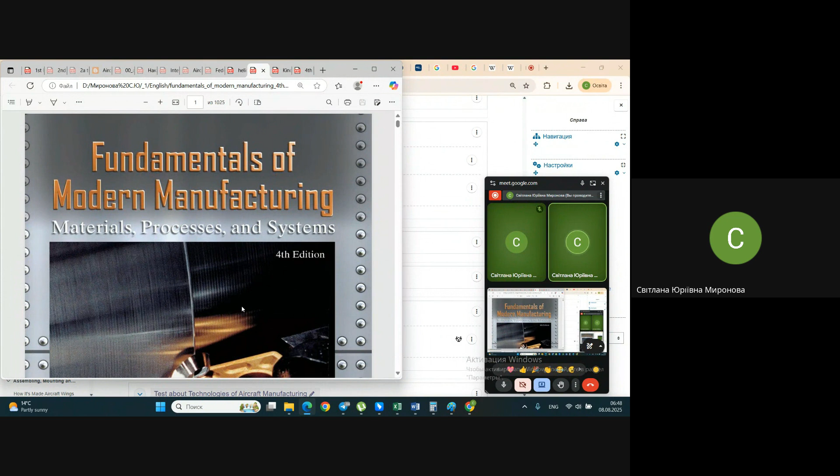Before we go into studying manufacturing processes, peculiarities, and so on, first we need to talk about definitions and concepts. Do forgive me, I will use my channel immediately without making additional slides. Slides we will have, but not about this topic we're going to study right now.

First, we need to talk about what we understand as technology at all. Actually, even before this, we need to talk about production, or not even production cycle — it's called product life cycle. What do we understand as product life cycle? Better we'll talk about it at the end, when we have already surveyed everything and approximately understand everything. Approximately understand — no one understands it completely, you know. Then we will do a survey of production, of product life cycle, when it comes to aircraft.

So, technology — what is understood as technology? In our language, we have two different words: технология and техника, technology and something like technique. But in English, they have only one word for two different concepts. Technology, on one hand, is understood as families of vehicles, let's say — for instance, aerospace technology. The native speaker of English understands it like aircraft, airplanes, space rockets, and so on — aerospace technology, vehicles.

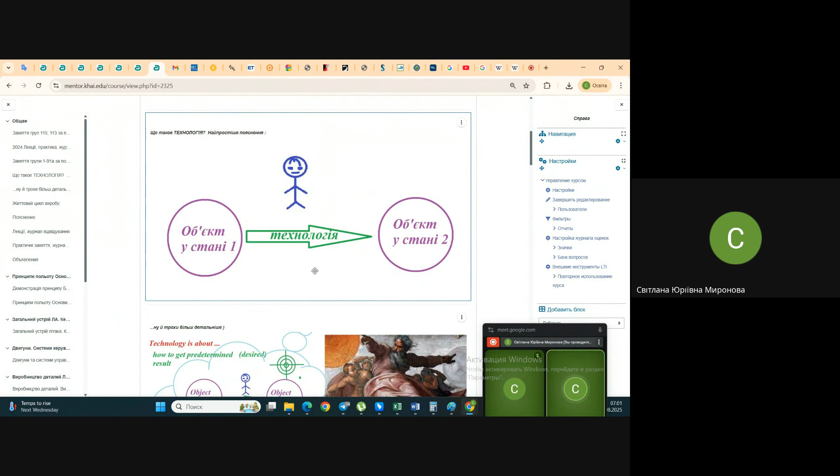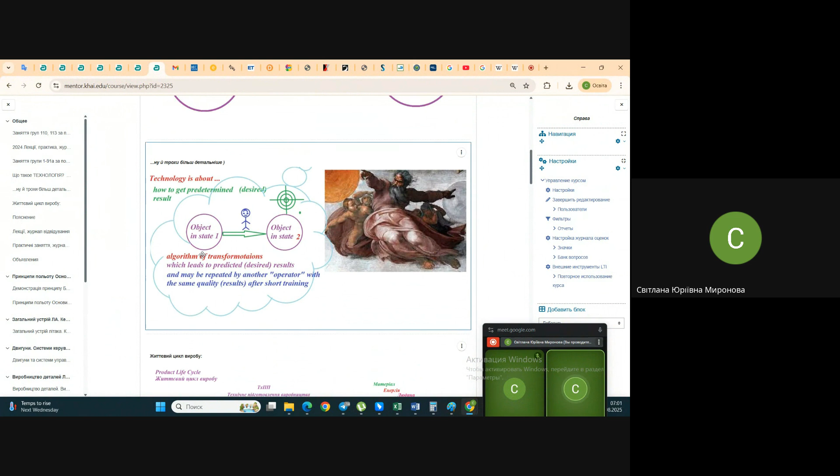Here is a picture in English now. Technology is about how to get predetermined, desired results. Here is such a scheme in English. Where did it disappear from the English slide? No idea, I need to place it back. Technology, once again, includes three hidden moments in this definition.

First, it's the algorithm of transformation which leads to desired intended results. We understand it already. And what is the difference between technology and art? A piece of art can't be repeated exactly by someone in the same way.

A piece of art is a unique thing that is not to be repeated. It may be copied somehow, especially by modern means. It may be replicated, repeated sometimes, but it's not about being reproduced exactly. It will be visible anyway that it's a copy of a piece of art, and even copying this piece of art usually takes a long time, whether it's sculpture, garden design, buildings, or whatever -- if it's a piece of art, it's not to be repeated.

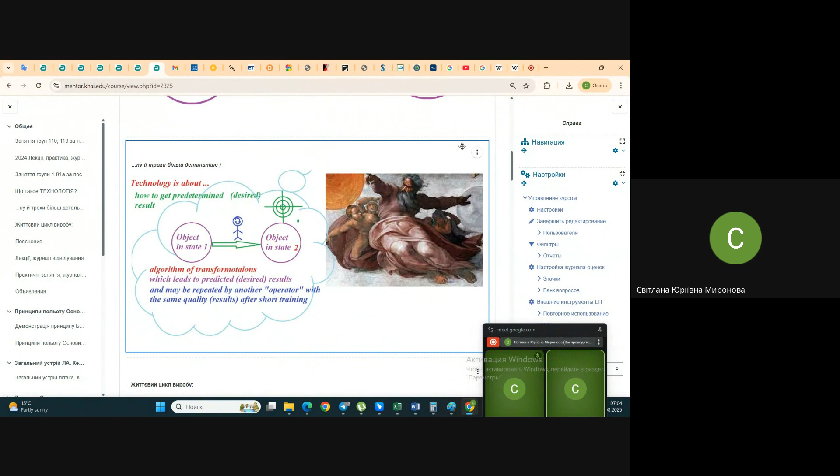Once again, what are these three secret moments? Algorithm of transformation -- we have some aim, we mean to reach some exact results. Hidden within transformation, the object is changed during this technology's application. And technology has the property of repeatability by another person.

That is technology. Now let's come back to what we started with. Okay, let's leave it here. On the left you see my picture, let's say, and on the right you see a piece of art by Michelangelo Buonarroti in Italy, a masterpiece. Well, we needed this, and we need also this. So you understood, I hope.

And now, an important moment in the scheme that was visible -- object. What is the object of technology? What might be those objects of technology? Do pay attention. Next post. Here is.

Once again, it may be some piece of nature, raw materials, so-called raw materials -- earth, water, oil, gases, wood, whatever. It may be some semi-finished product that has already been processed preliminarily by someone else.

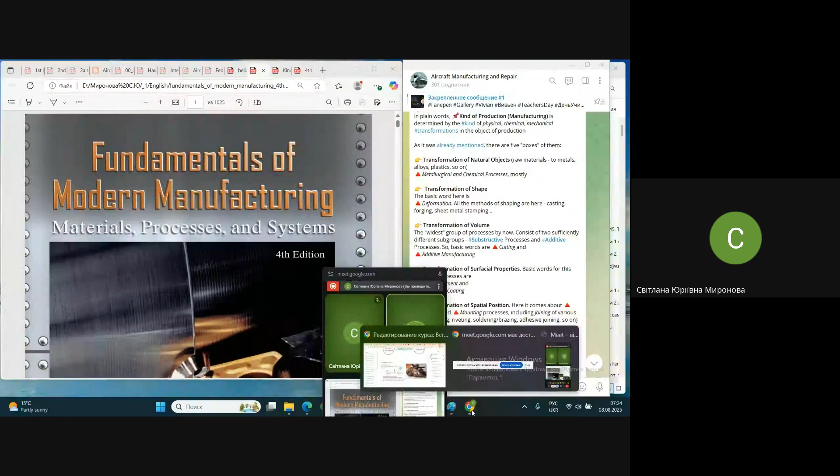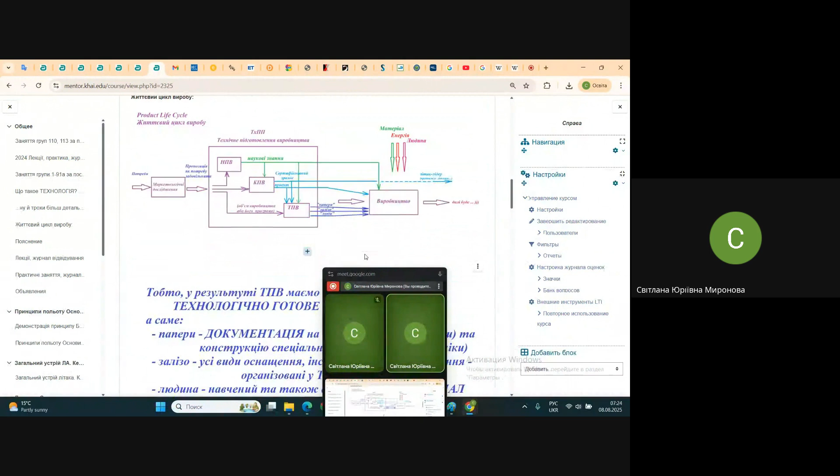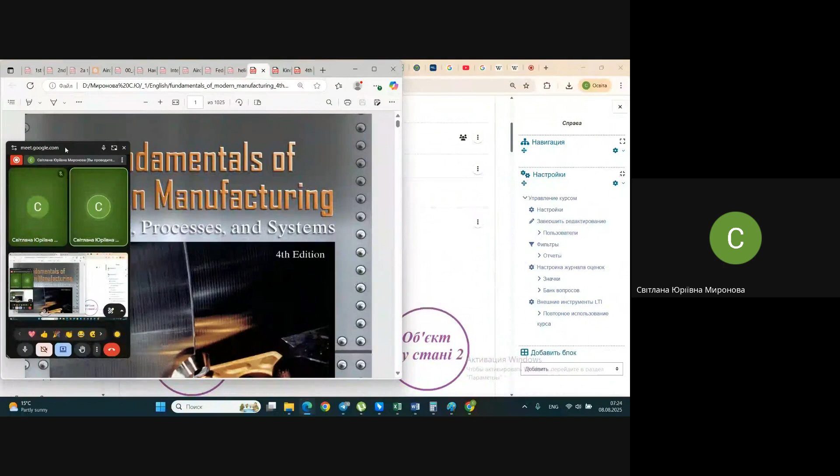Originally, each transformation in schemes was reproduced like a black box, let's say. We do not... where am I? Here it is. How do I move it to another place? No, not here. Somewhere in my folders. We will draw a similar scheme anyway. Why wasn't this scheme prepared for you preliminarily in these slides? I need to place it so it doesn't interfere with the screen, but on the other hand gives me the opportunity to operate the screen. I'm afraid to remove it because in that case I might lose attention and not notice if something went wrong.

As it was already sometimes when I've been recording your classes, well, you see.

Transformation of natural objects usually isn't about manufacturing of aircraft. Usually it comes about products of metallurgical, chemical industry. It's not mostly what we're talking about when discussing manufacturing technologies.

Once again, we represent this scheme as so-called black boxes. Black boxes means we don't try to understand what is inside, we watch only what is on entrance and what is on exit.

Originally, on entrance we have natural objects, whatever kind they are, so-called raw materials. It's metal ores, it's wood, it's water, raw oil, gas, whatever - some minerals, some organic, non-organic materials.

And finally, what it may result in is either appearing of some pure metals, or metal alloys, or materials like ceramics. Ceramics may be traditional ceramics we get used to, so-called soil, or it's maybe already metal ceramics, even powder metallurgy, so call it.

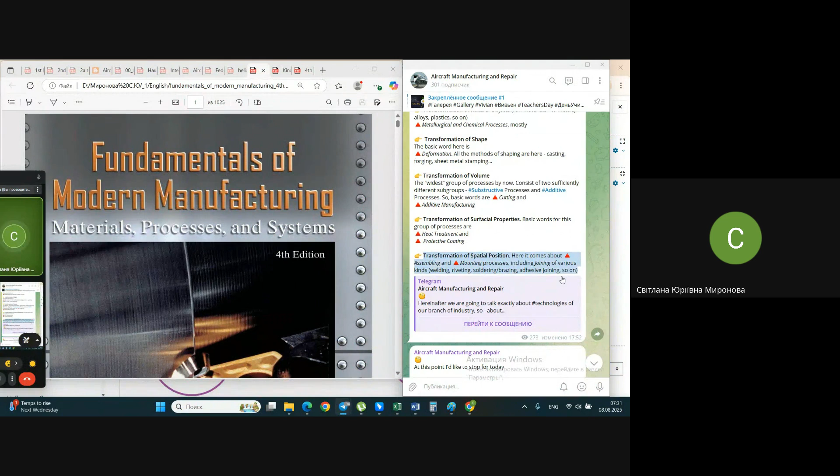Here it comes mostly about assembling and joining. Together with assembling, like hand in hand, goes so-called mounting processes. Actually, joining is a portion of assembling and mounting processes. If necessary to understand transformation of spatial position, once again: assembling, joining, mounting.

And inside each of those groups, there will be a lot of not even processes, but first it comes about different subgroups. And next it comes about the processes inside of these subgroups and sub-subgroups.

Of course, we may start drawing this scheme immediately, but really it may be more simple for you first to see some illustrations, maybe even a short video, and next all the information we have gotten we will try to align into a scheme. To be frank, why I said we have no such scheme, like why I have no one sheet, one piece of paper or one screen with this scheme - each time we draw it together with students, together really in classes, it's a little bit technical, not simple for me, but better for you, for your understanding.

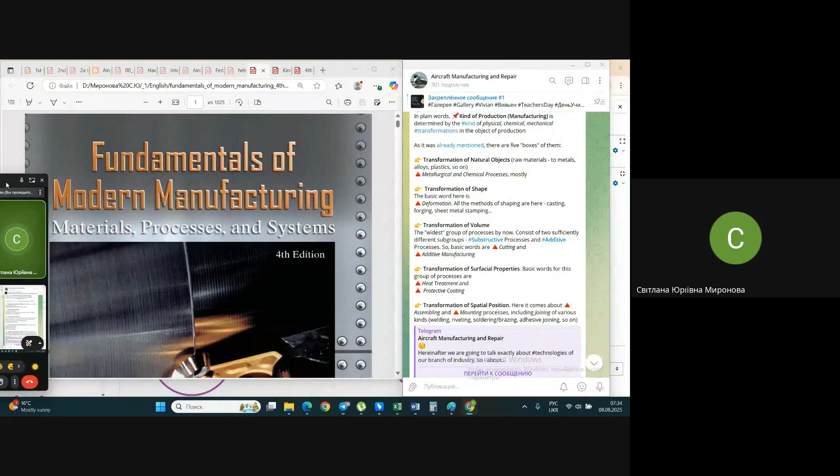As I said, it comes about hundreds of different technologies, and any attempt to align everything on one piece of paper would make that paper enormous. Computers help in this sense, we may use an endless sheet in Paint or elsewhere to try to create such a scheme. Usually we see these schemes by pieces, given in different books and standards, because if you try to categorize all those processes by groups, subgroups, classes, and subclasses, it becomes too much, a very difficult scheme to understand and watch. So usually it's not given as a single scheme for everything.

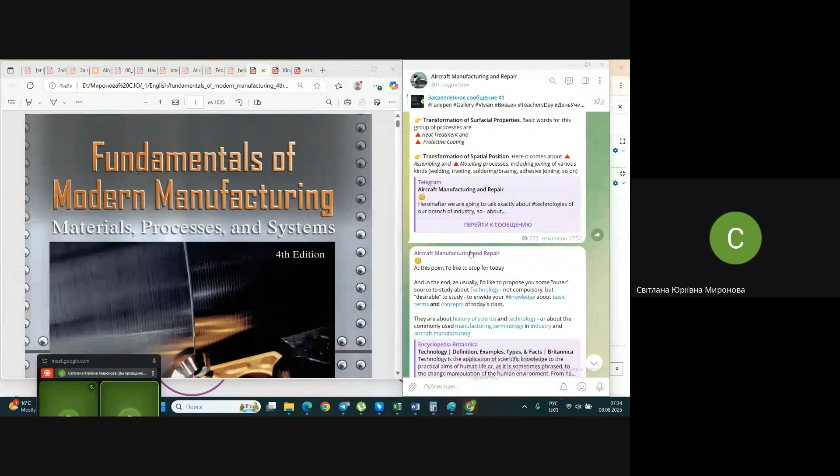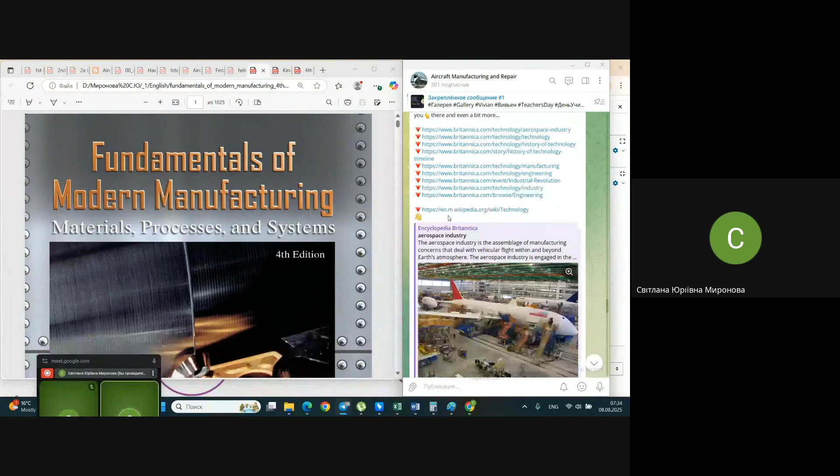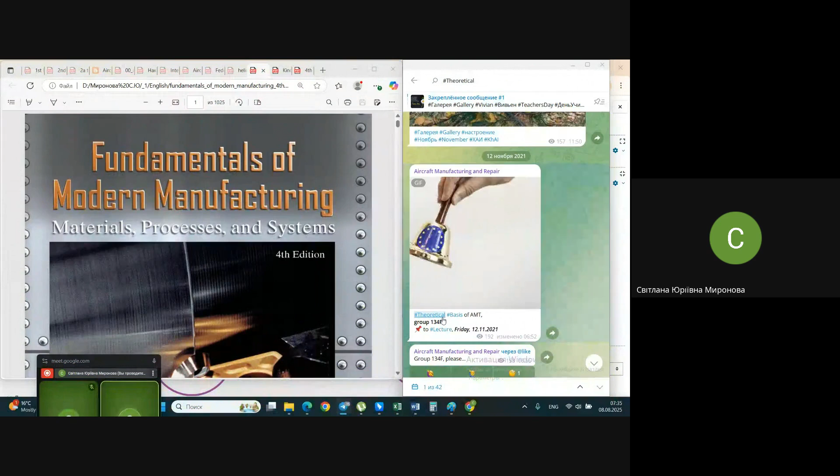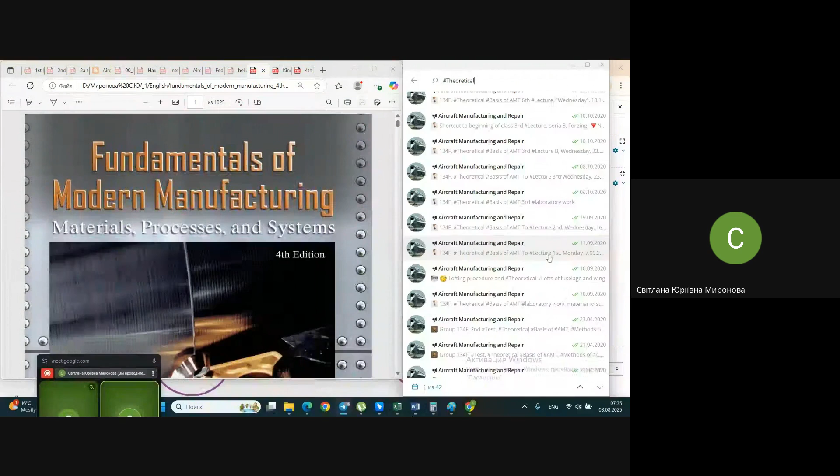Well, let's proceed with particular technologies. Let's watch. It was in real class, and at this point we're going to stop today, but of course we're not really stopping, we continue. In order to continue I would like to find the right place. Theoretical... we have been somewhere here, lecture first, lecture second, lecture third. I will stand on this place, in order to see some illustration next.

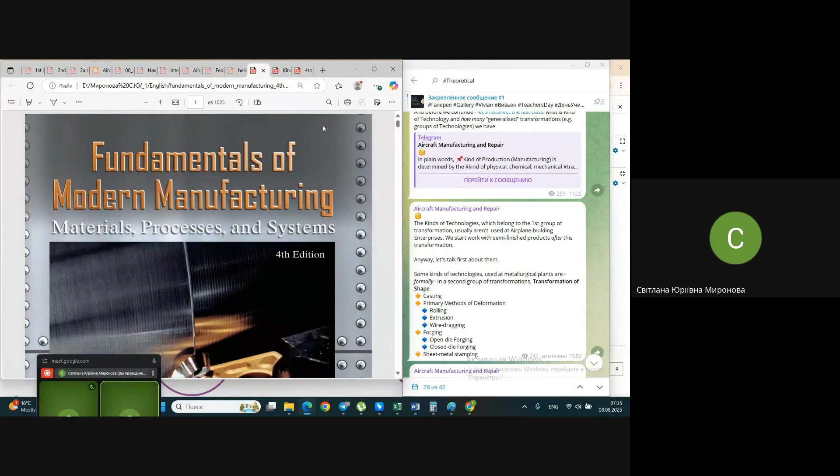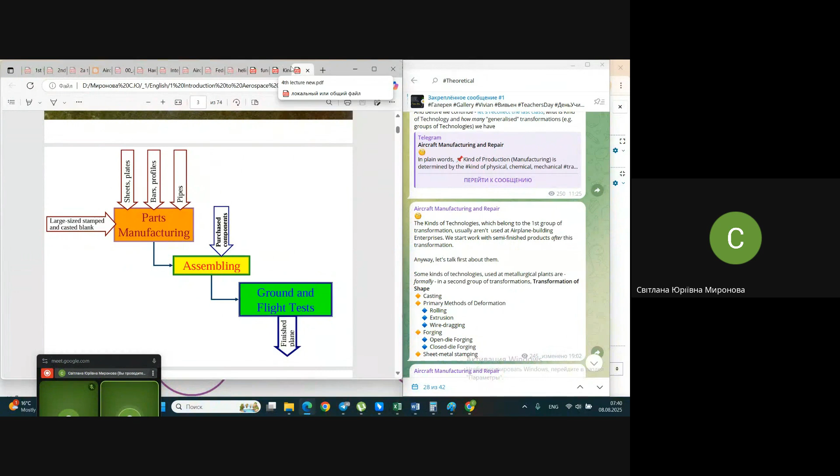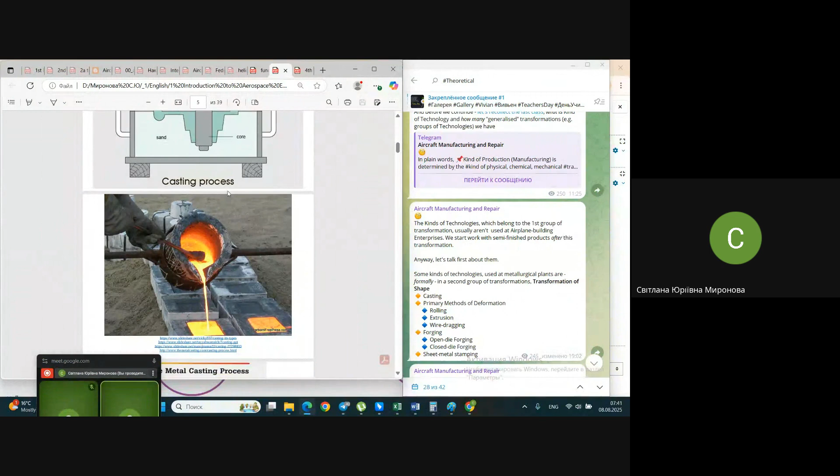So we will start first with another set of slides, and this set of slides starts with classification of casting processes. Let's interrupt the recording for some seconds.